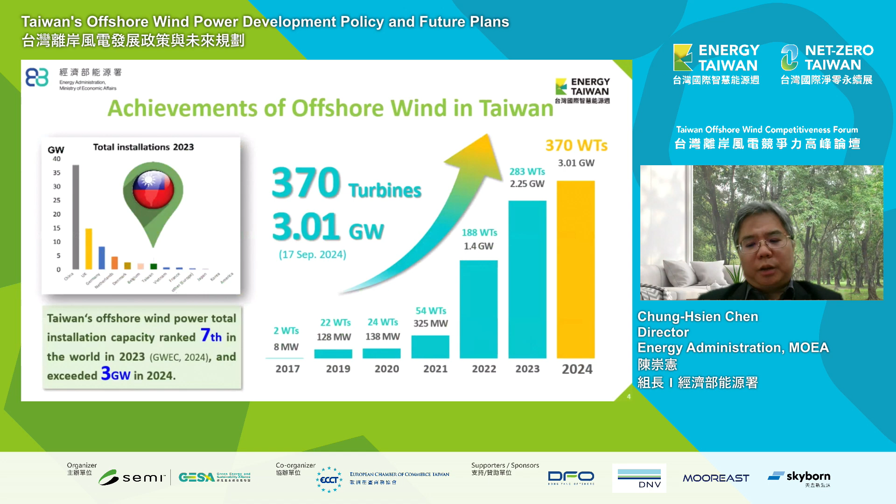Almost all of you will know this potential - Taiwan has good potential for offshore wind power. For nearshore, where water depth is below 20 meters, the feasible capacity will be about 1.2 giga. For deeper water, meaning water depth less than 50 meters, that will be about 10 giga.

For even more deeper water, where the water depth is more than 50 meters, we have bigger potential compared to the shallower deep water. But at this moment, for water depth below 50 meters, it's about 11.2, and they have well planned that all the development will focus on these regions.

For deeper waters, we also have sites for bottom-fixed technology. But for more water depth, maybe we have potential for floating technologies. So for Taiwan, we not only have bottom-fix potential, we may also have big potential for floating technologies. The government will pay more attention to bottom-fix projects, but we also put effort into the floating technologies.

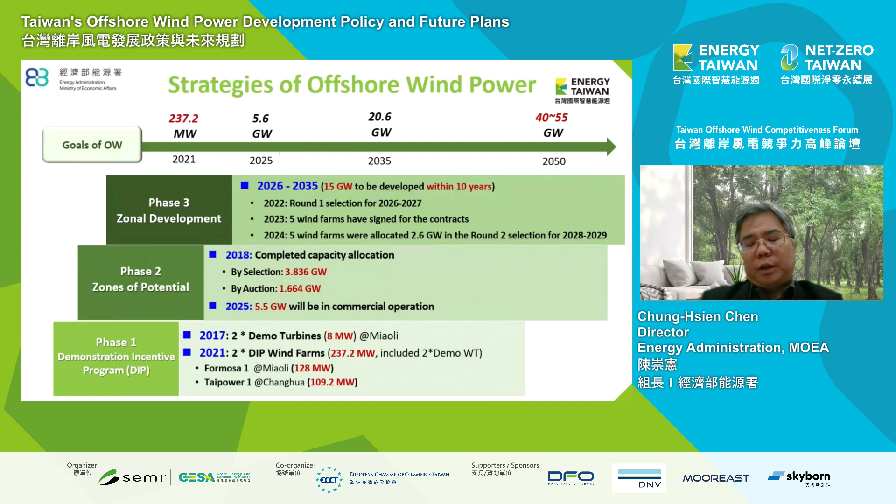And by the way, we are going to the so-called third phase. Third phase, I think we will complete about 3.1, even 3.2. We may have some issues, maybe WTO issues, but I think we will follow the way in a stable manner and reach our target by year 2035, even 2050.

At this moment, we have the 6th commercial wind farm in Taiwan. I think the first one was in year 2019. I think the Formosa one was the successful milestone for the Taiwan offshore wind market.

I want to share that this year we have 3 commercial wind farms in Taiwan. The big one will be the Greater Changhua, with over 100 turbines in the Taiwan Strait. The other ones are Changfang, Xidao, and Zhongneng.

Yes, they got all the projects on time. I think it's a good milestone for Taiwan. Every project will be grid-connected on time.

I want to share some future plans for the offshore wind market. It's some kind of challenge for Taiwan, but also an opportunity for Taiwan.

You know that in Taiwan we have big enterprises. They need some green power to follow international regulations like RE100, even for some Apple supply chain or Google supply chain. Maybe the target isn't just year 2030 at 30%, but there may be a more aggressive target, maybe by 2027, 40% renewable energy.

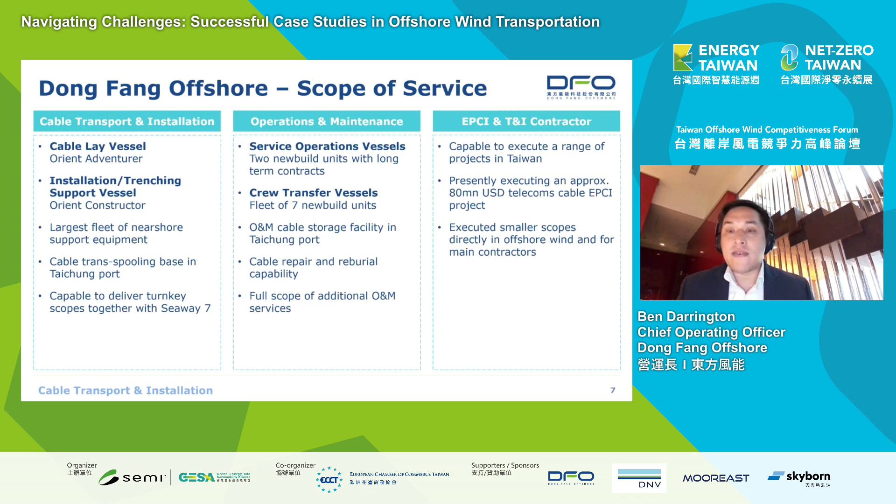Our fleet totals 16 vessels, of which we have 2 construction support vessels, one working as a cable laying vessel and the other in trenching and installation support mode. We own 5 CTVs and operate 2 CTVs on behalf of other parties. We own a fleet of anchor handling tugs that work primarily as guard vessels in offshore wind farms. We have a survey vessel, the Orient Explorer, used a lot for bathymetric surveys, a flat top barge, and 2 new construction cable repair service operating vessels being built for our customers here in Taiwan.

A little bit about our fleet. This is the Orient Adventurer, the largest vessel in our fleet and our cable laying vessel. It's in what we call version 1 configuration this year and currently works on the Yunlin project. It's a DP3 vessel, 130 berths, 270-ton vertical lay system, 15-ton horizontal lay system, 2 work-class ROVs, and a big subsea crane. I think she is the second largest Taiwanese-owned construction vessel after the Green Jade here in Taiwan, and the first Taiwanese power cable installation vessel within the Taiwanese market. It was a lot of work to develop this product, but we're really happy that this year she's had a successful season on the Yunlin project.

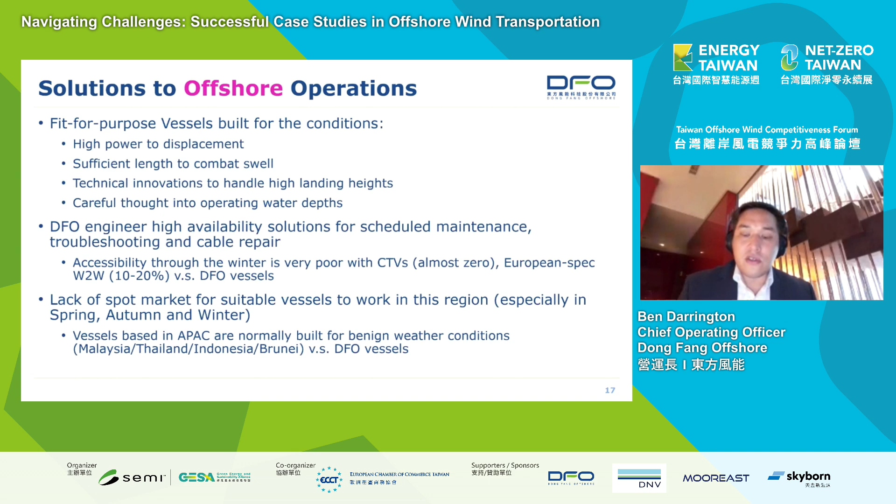This is our brand new CSOV. A couple of the interesting technical innovations that we can share with you: we have selected propulsion that allows us to keep very tight DP footprints to manage safety offshore, which a lot of our competitors actually don't do. It costs a lot more money to do this, but it greatly improves safety, reliability, and workability, and also allows us to add active roll reduction, which again increases safety, but also workability.

We've developed a vessel with very nice hull lines designed to reduce motions, especially in these long swell conditions. And finally, we've implemented state-of-the-art equipment designed to compensate and manage the accelerations and motions when you're transferring in high sea states, in very difficult conditions with high transfer heights.

We see a couple of challenges of operating within Taiwan, even as a Taiwanese domestic owner, which makes it sometimes difficult when discussing our projects and competing against European owners. The first one is that in Taiwan, we have a very high tax regime for vessel owners and contractors. Within Europe, it is common to have a very low or no tax regime.

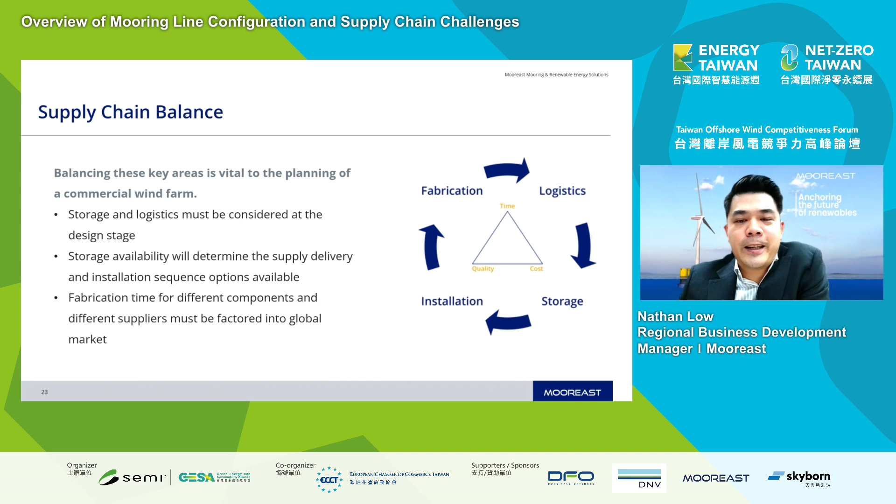Thank you very much, Nathan. Good afternoon, everyone. So I will be giving an overview of the fabrication, the considerations and strengths of a large fabrication facility.

What you should also consider is if it's close to a shipping lane, as in most cases you may be looking quite far for specific components. There might also be the case of local content, but this is also quite difficult. The next thing to consider is if the supplier has access to a quayside, or if it's landlocked.

We're at 15 megawatt turbines at the minute, but things are continuing to get larger, which means that the transportation of components via road is increasingly more difficult. Especially when you start to consider the likes of steel chain and larger anchors, it only makes sense to have a quayside if possible, or at least one very close by.

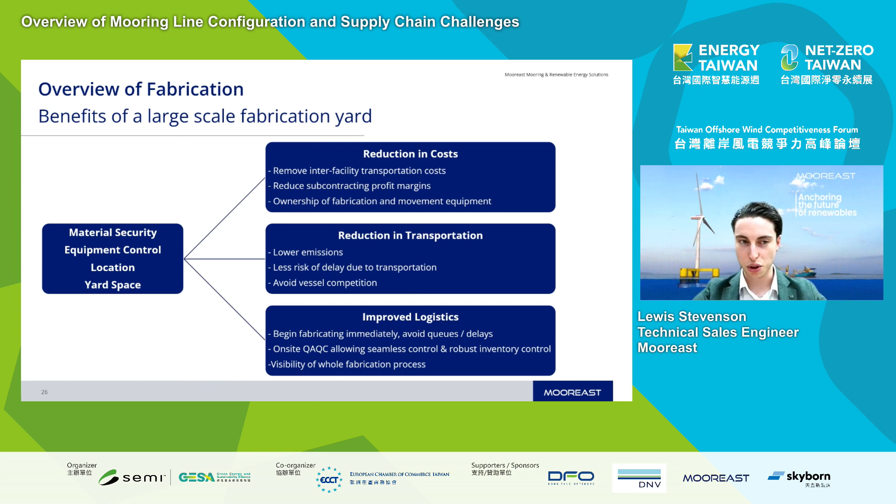So that was a good overview of fabrication, but moving on to storage now, which I can promise includes more pictures. To give you a quick comparison of the different anchor sizes that are generally used in floating offshore wind, the most popular are the drag embedment anchor, the driven pile, and the suction pile.

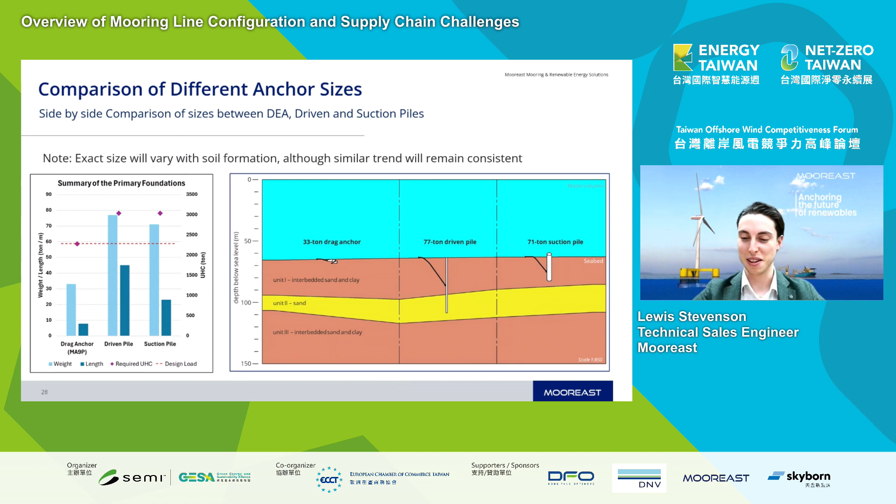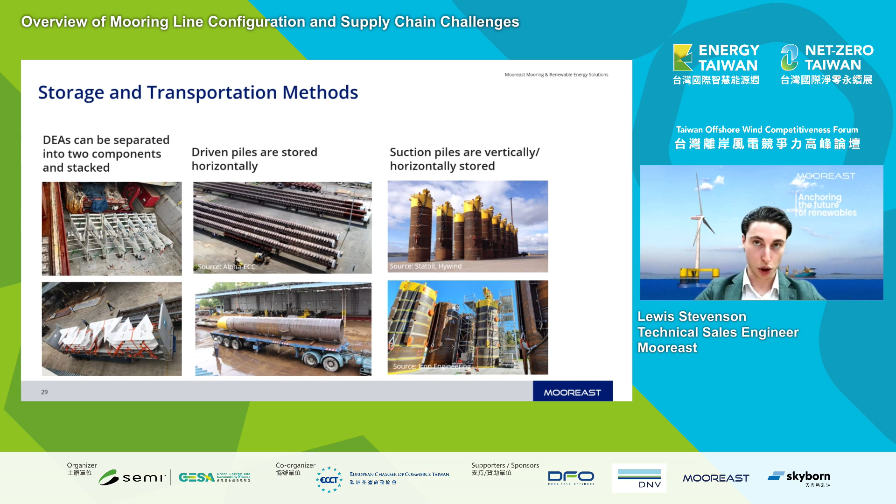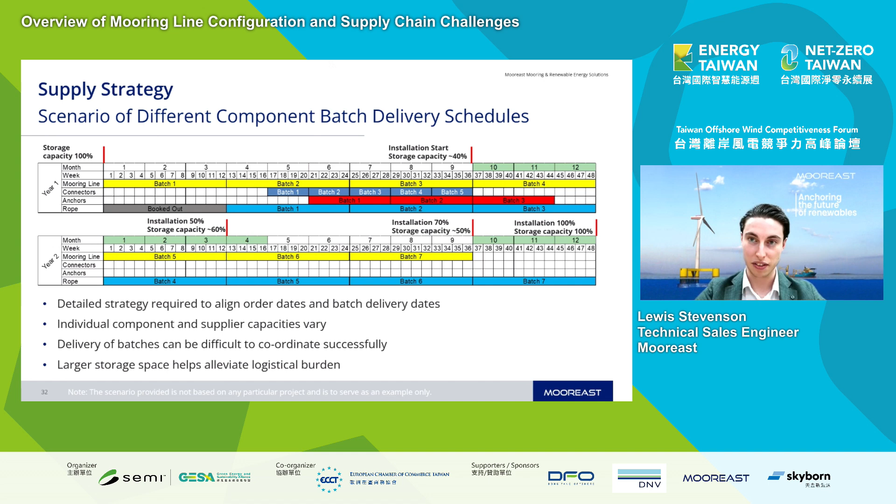But what does that look like in terms of numbers? I've talked a lot about the challenge behind it, but to help paint the picture numbers-wise, for a 180 megawatt storage requirement, you would be looking at, for the individual components combined, about 29,000 tons and about 21,000 meters squared storage area, which, to help visualize, is around 2 to 3 football fields.

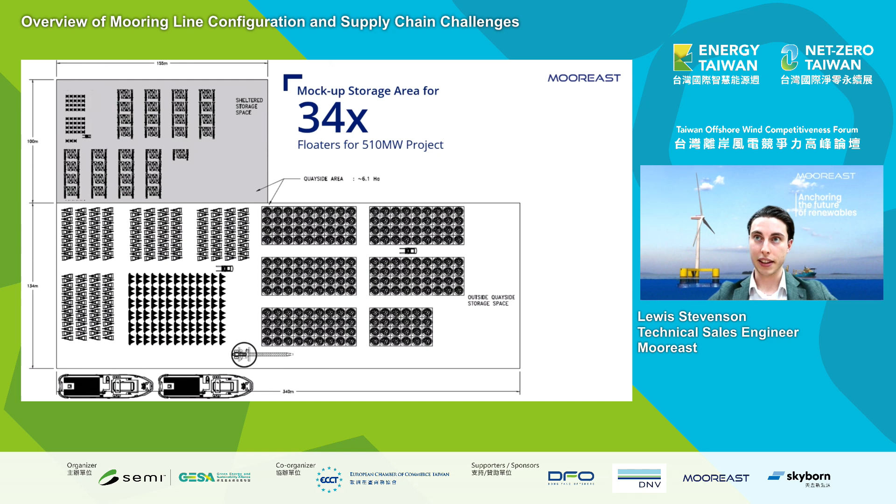Lastly, to give an additional example, the two previous ones were for drag embedment anchors. But as we discussed, drag embedment anchors have a much smaller footprint - if we look at piles instead, the numbers essentially jump up: in terms of weight you'd be looking at moving around 100,000 tons, and you'd need a cumulative storage area of around 67,000 meters squared. In terms of football fields, that's around 9 or 10, mainly because they are being stored horizontally.

So moving on to the key points now. Global capacity is increasing, resulting in a constricted supply chain. My colleague Nathan shows some great graphs about when we start to hit that 2028 to 2030 period, demand really exceeds supply, which is why early action is something we are trying to really emphasize. Material security is vital in preventing delays and allowing fabrication to start as soon as possible.

Diligent selection and fabrication yard can allow a reduction in cost, transportation, and greater control over the whole life cycle of a component. This is something we're really trying to highlight - if you can reduce cost, a lot of cost models done early on tend to overlook these additional operational costs and logistics, which is something we are trying to stress.

A lot of the time when early modeling things, you can look at the cost for individual components, but then you may overlook the likes of the cost for on site where you're moving things around with cranes, day rates, etc., and then also the required vessels for moving and transportation.

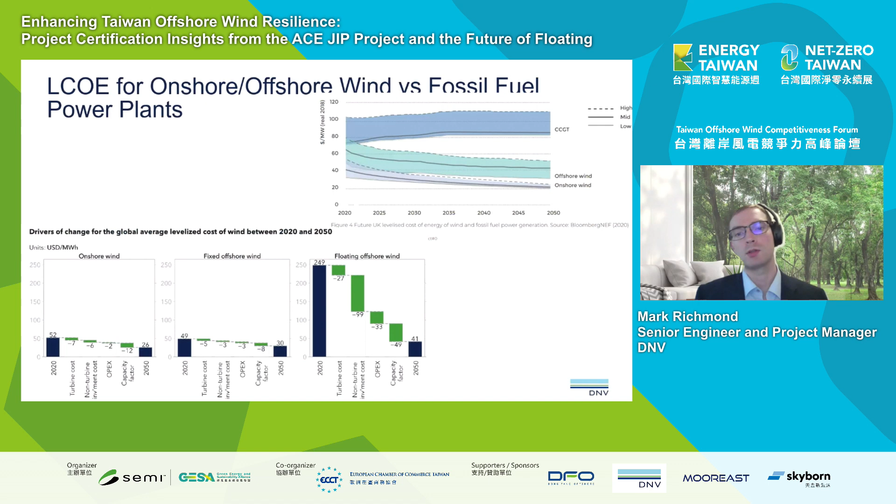For our experience in project certification, DNV does type certification and project certification. We have been the project certification body for almost all of Taiwan's offshore wind farms. Of the 6 that have been connected to the grid, we have been the project certification body for 5 of those, and we're a PC body for all of the others. We've worked on Hailong, Zhongneng, Changfang Xidao, Taipower, Yunlin, the Ørsted projects, Formosa 1, 3, 4, Haisha, Fengmiao, and the Weilanhai Jianghua project.

So we've seen all of the potential challenges and pitfalls that projects can have, from the environmental conditions, from typhoon, seismic, soil conditions, design challenges. We've been involved in the construction phase and transport installation phase. We do workshop approval for the supply chain. So we have seen all of the potential challenges. We've also seen all of the successes in the industry, and we're very proud that we've been able to have some part in supporting that.

So fundamentally, what is project certification? You could take a standard which defines how a project should be conducted, or the engineering that should be involved, and we compare this with the project itself, with the documentation provided by the project. You could have any standard. DNV writes several standards. There are other standards that we can certify to, as we are accredited by ISO 17065. We're one of the few certification bodies that can certify to OD 502.

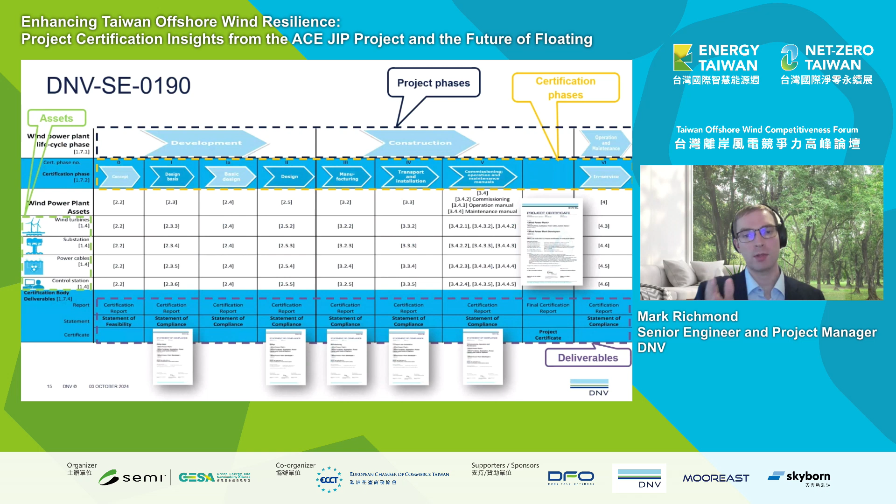Now to discuss the ACE Joint Industry Project. This project came about because of challenges in new markets, which are not experienced so much in Europe. These challenges specifically in this project are earthquakes and typhoons.

For earthquakes, there's uncertainty in design conditions, geotechnical conditions, and the combination of loads between wind and earthquake loads. There's inconsistency in how these design approaches are used. The international and local codes are maybe insufficient or not harmonized.

In typhoons, there's large uncertainty in the extreme wind speed that can be experienced. There's uncertainty in transferring local building codes. Detailed models can be expensive and uncertain, and there's really a lack of measurement, particularly around Taiwan and other markets where there's not such a history of oil and gas, and so not many measurement stations have been installed previously. So this becomes a bit of a challenge when trying to estimate long return period values.

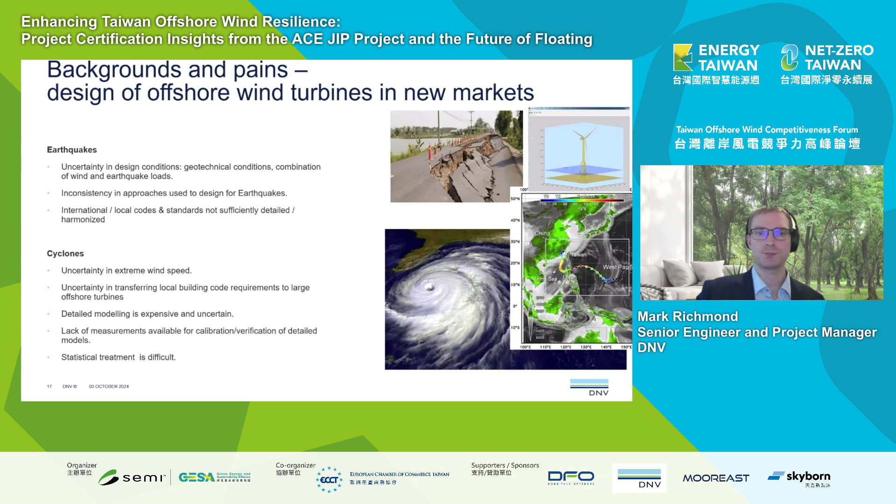For the cyclone workstream, we conducted a critical review of available cyclone measurements and state-of-the-art modeling. We selected a few well-documented cases to conduct a case study. We benchmarked the models against each other and against measurements, and quantified the strengths, weaknesses and limitations of these. This work resulted in a technical note, which was released.

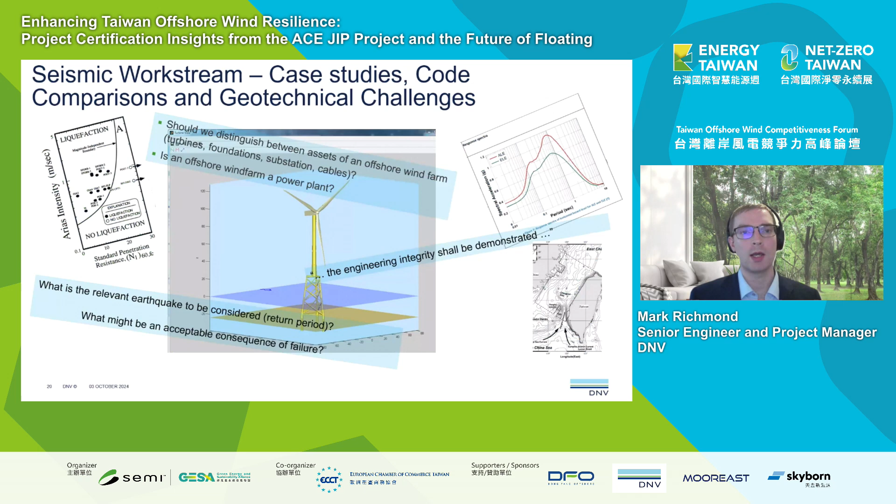On the seismic workstream, we conducted quite a bit more work and accomplished some good results here. We conducted a summary of existing standards and methods. We addressed geotechnical challenges such as damping, liquefaction, and combination of time histories.

We benchmarked different approaches. Here we used independent structural analysis to compare time and frequency domain. We compared integrated versus submodel approaches. We used different turbines and foundation types. And we calibrated and validated some simplified models to be used.

This work resulted in a recommended practice called DNV RP 0585, which covers the seismic design for wind power plants. This recommended practice is changing the way that the industry conducts its seismic analysis and is used on pretty much all future projects that have seismic conditions.

ACE1 was seen as a very large success, but the industry is still hungry for more information on this. So we are currently conducting ACE2, which covers further details from the previous ACE1. This should be completed relatively soon, so look out for this.

On floating offshore wind, we have a service specification called DNV SE0422, which covers the certification of floating offshore wind power plants. This recently had an update, which I'll talk about later, but it covers concept, basic design, project certification and class, and in-service. We see that many of our customers go for basic design, which is a more general type of certification, where the size of the turbine is known, but maybe the specific turbine isn't. So this is a fairly common service that we see.

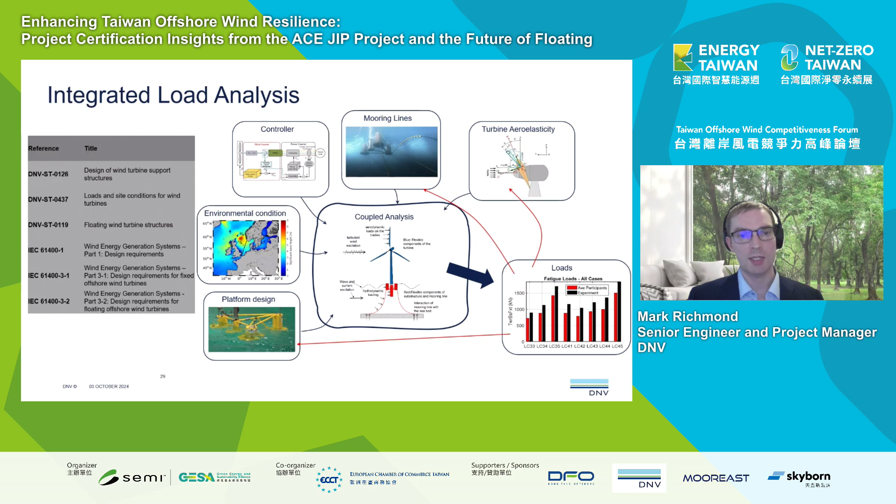For floating, there are further additional challenges. There's more complex hydrodynamics, such as wave diffraction, and coefficients need to come from tank tests. There's longer simulation times needed. For fixed bottom, we typically use 10 minutes. For floating, we typically use 1 to 3 hours due to the movement of the platform.

There are additional cases to consider, such as a robustness check with a high return period, such as 500 years. There are additional failure cases to be considered, such as the loss of mooring lines, and there's further stability analysis that needs to be performed.

Some learning outcomes from our long experience in floating: the project should be considered as more than just a single floating structure, which may have some similarity to a floating oil and gas platform. Instead, it should be considered as an energy system combined with the environmental effects, the wind turbine, the cables, and other aspects, because in the end, it's an energy system with the goal of delivering power to the shore.

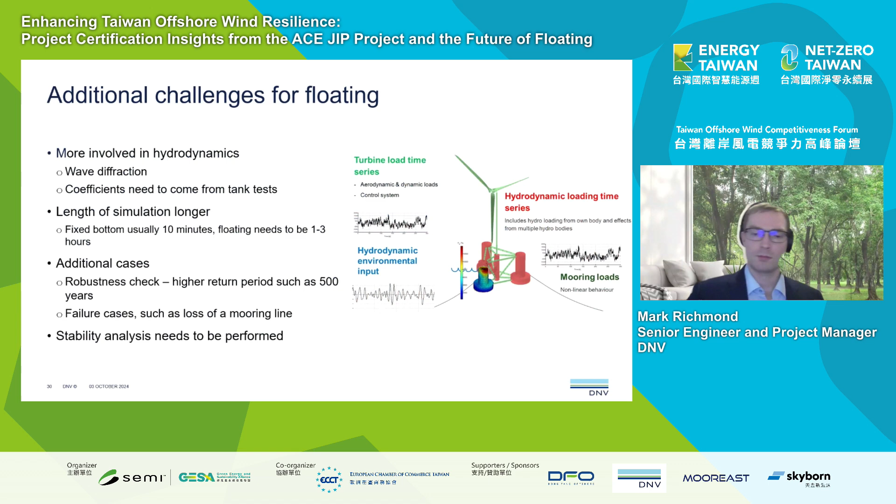So in the end, to summarize, DNV is a highly experienced project certification body, leading globally and leading in Taiwan. We conduct many joint industry projects. One of note is the ACE JIP with the resulting DNV RP0585, which has changed the way typhoons and seismic are conducted in the industry.

DNV is also the leading certification body in floating. We've conducted more than 50 projects worldwide, and we're currently conducting between 15 and 20. We're highly experienced here. We had the first floating certification standards, and we issue more wind-specific floating standards. We are looking forward to supporting the Taiwan industry with coming floating demonstrator projects and more into the future.